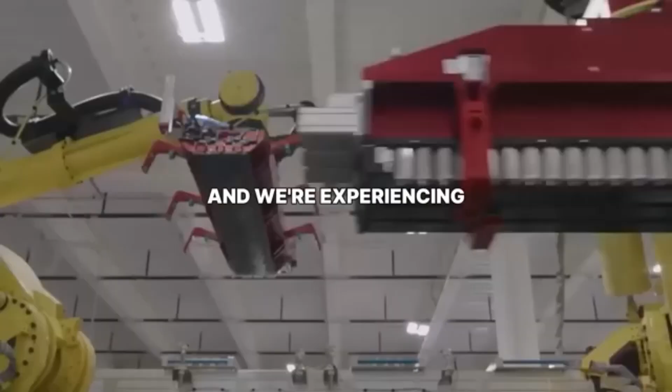We are 70% water and only 30% land. And so really, the availability of fresh water is simply about energy and transport. Obviously, the issues we're facing are very serious, with climate change, and we're experiencing these issues on a day-to-day basis.

Tesla has long been at the forefront of battery innovation, with every vehicle relying on its advanced lithium-ion technology. The evolution of the Model Y, much like the Model 3, has seen steady improvements, most notably the introduction of Tesla's groundbreaking 4680 cell battery.

But now Elon Musk announced that he would be using aluminum-ion batteries for its 2025 Tesla Model Y. What makes this new battery so special, and will this battery be the one to replace lithium-ion technology and power the next generation of Tesla's Model Y? Tesla's next big battery leap.

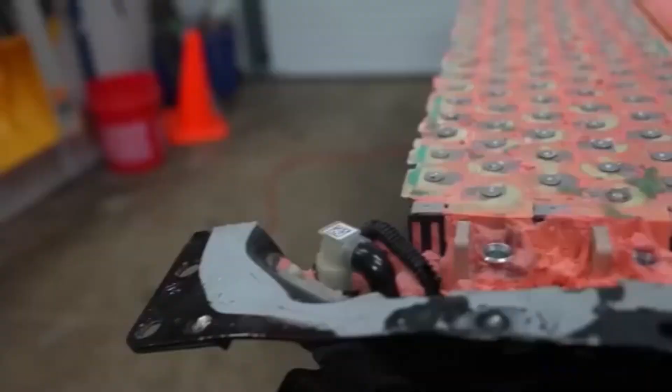If you know Elon Musk, you know he's a man who loves challenging the odds. His habit of breaking barriers and presenting bold ideas sets Tesla apart from competitors like Volkswagen and GM. From revolutionizing electric vehicles to evolving solar energy, the company has consistently pushed beyond the limits of what's possible. And now, with the same spirit, Tesla is taking on a new challenge with aluminum-ion battery technology, an innovation that could change the game for energy storage, electric vehicles, and sustainable living.

With this bold vision, Tesla would be the first automotive company to use an aluminum-ion battery, and it's easy to see why this breakthrough is sparking so much excitement. With the potential to charge fully in 15 minutes, aluminum-ion batteries are rewriting the rules for the future of electric vehicles. This next-generation technology has the potential to redefine how we think about powering our cars.

Under Elon Musk's leadership, Tesla is once again pushing the boundaries of what's possible, exploring this cutting-edge technology to drive the next wave of innovation. But what exactly makes aluminum-ion batteries so special, and why do they hold so much potential?

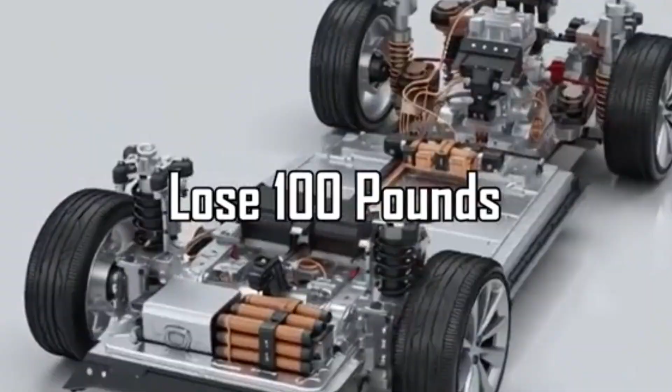To start, aluminum-ion batteries bring several remarkable advantages to the table. Aluminum, the third most abundant element on Earth, is a game-changer in terms of accessibility and cost. Unlike lithium, which requires intensive and often environmentally damaging mining practices, aluminum is easier to recycle without compromising quality. This means that these batteries are not only more affordable to produce but also far more sustainable, aligning with Tesla's vision of an eco-friendly transportation future.

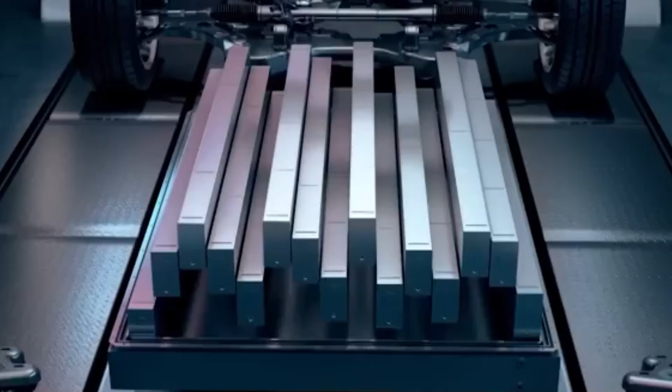The backbone of this technology is a state-of-the-art material, an organic redox polymer based on phenothiazine. While it sounds complex, this innovative material essentially allows aluminum-ion batteries to hold more energy than traditional designs. In fact, their storage capacity, measured at 167 mAh per gram, significantly outperforms the graphite typically used in lithium-ion batteries. This innovation opens the door to higher energy density and better performance, making aluminum-ion batteries a strong contender to replace lithium-ion technology.

Not only this, but the aluminum-ion batteries have the potential to achieve an energy density of 1,060 watt-hours per kilogram. To put that into perspective, today's lithium-ion batteries typically cap out at around 450 watt-hours per kilogram. This means that aluminum-ion batteries could store over twice as much energy without increasing the size or weight of the battery pack. For EVs, this translates into a significantly extended range, potentially up to 2,000 miles on a single charge.

Imagine driving across the country without worrying about running out of power. That's the promise this technology holds. But it's not just about how far you can go, it's also about how quickly you can get back on the road. Aluminum-ion batteries are designed to fully charge in just 15 minutes, as we said previously, a dramatic improvement

over the 30 to 45 minutes required by most lithium-ion batteries to reach 80%. This kind of rapid charging could transform charging stations into quick pit stops, making EVs as convenient to recharge as filling up a traditional gasoline tank.

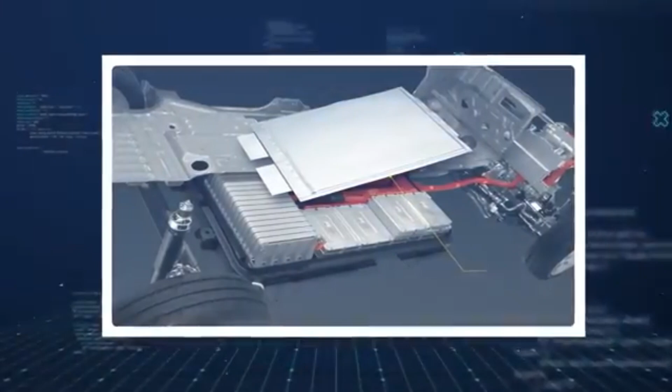Durability is another standout feature of aluminum-ion technology. These batteries are built to last, retaining 88% of their capacity after 5,000 charge cycles. Under optimal conditions, they can support up to 15,000 cycles, giving them a potential lifespan of 20 years or more. This durability not only reduces the need for replacements but also makes EV ownership more cost-effective and sustainable.

But what about Tesla's current lithium-ion technology? What challenges are pushing the company to explore this new frontier, and can aluminum-ion batteries truly deliver on their promise to revolutionize EVs? To understand the driving force behind Tesla's shift, we need to take a closer look at the limitations of the 4680 battery and the opportunities that aluminum-ion technology presents. Why lithium battery can't keep up?

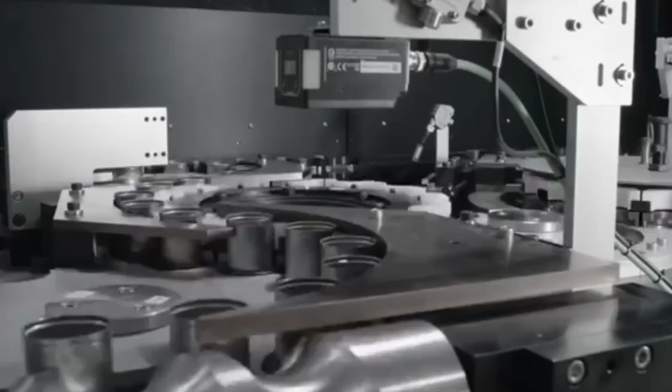Tesla's 4680 battery has been a major milestone in the evolution of electric vehicle technology, offering significant improvements over its predecessors. With its innovative tabless design and advanced chemical composition, the 4680 battery has brought new levels of efficiency, power, and integration to Tesla's lineup.

It powers vehicles like the Model Y, delivering a range of approximately 330 miles on a single charge and charging to 80% in around 30 minutes using a supercharger. Yet despite these advancements, the limitations of lithium-ion technology remain, and these constraints highlight the growing need for alternative solutions.

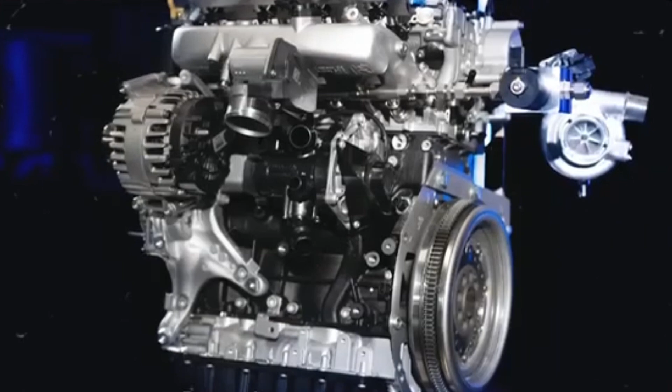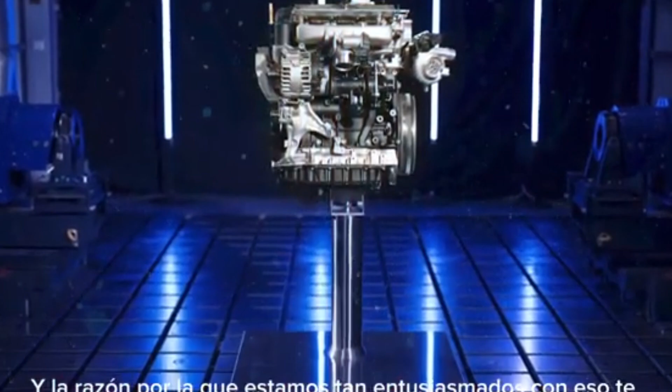One of the most prominent challenges lies in the energy density of lithium-ion batteries. The 4680 cells, with a density of around 255 to 280 watt-hours per kilogram, represents a significant leap forward compared to earlier designs. However, this still restricts how far an electric vehicle can travel on a single charge. While Tesla has optimized the use of this energy to extend range, it is clear that lithium-ion technology is nearing its ceiling, making it harder to push boundaries without exploring entirely new materials and designs.

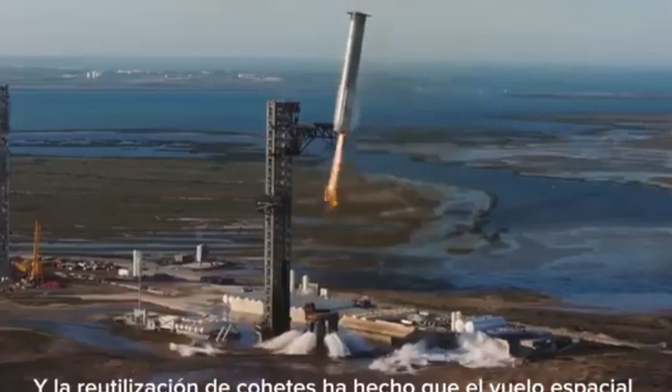Charging speed is another area where lithium-ion technology shows its limitations. Although the 4680 battery can reach 80% charge in 30 to 45 minutes, this is still a far cry from the convenience of refueling a gasoline vehicle. For drivers looking for quick and efficient pit stops, this can feel like a compromise, especially when electric vehicles are marketed as the future of transportation. Faster charging remains a crucial goal to make EVs more accessible and practical for a wider audience.

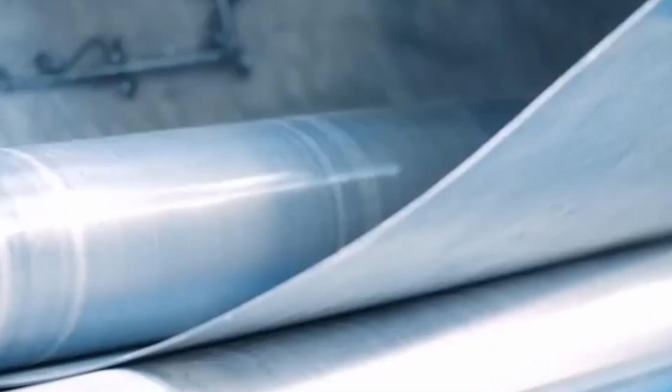We can't ignore the safety concerns here. These batteries rely on a flammable liquid electrolyte, which, in the event of physical damage or internal faults, can lead to thermal runaway. This phenomenon, where overheating causes a chain reaction that can result in fires or explosions, is a significant risk that EV manufacturers must address. Tesla's cooling systems mitigate this danger, but these systems occupy valuable space within the vehicle, space that could otherwise be utilized for more energy storage or additional passenger comfort. The reliance on such complex safety mechanisms underscores the inherent risks of lithium-ion batteries.

Beyond performance and safety, environmental and economic challenges further complicate the widespread use of lithium-ion batteries. The materials used in their construction, such as lithium and cobalt, are not only expensive but also difficult to recycle. These components often require resource-intensive processes to recover, making recycling costly and environmentally taxing.

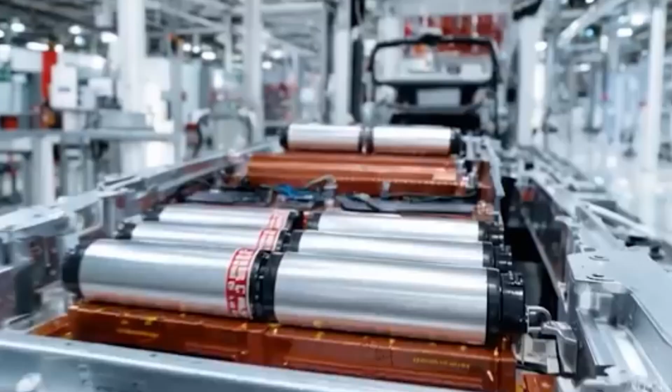Structural integration is one of the standout innovations of the 4680 battery, where the battery pack itself becomes part of the vehicle's chassis. This design enhances rigidity, reduces weight, and optimizes interior space, marking a significant improvement in vehicle efficiency. However, this innovation does not eliminate the fundamental reliance on lithium and cobalt, materials that remain costly and environmentally problematic. While the structural integration of the 4680 battery has undoubtedly pushed the boundaries of what lithium-ion technology can achieve, it also highlights the limitations that come with it.

These challenges point to a pressing question: is lithium-ion technology enough to sustain the rapid advancements needed in the electric vehicle industry? Addressing these limitations requires looking beyond lithium-ion technology altogether, and that's where aluminum-ion batteries come into the conversation. But along with this, there comes another question: can aluminum-ion batteries overcome these limitations and redefine the future of electric vehicles? The battery that breaks limits.

Building on this momentum, Tesla's shift toward aluminum-ion batteries isn't just an incremental upgrade, it's a bold step toward addressing the fundamental challenges of lithium-ion technology. These batteries promise to redefine the electric vehicle experience, tackling everything from charging speed to safety and sustainability. So how exactly do aluminum batteries aim to overcome the limitations of their lithium-ion predecessors?

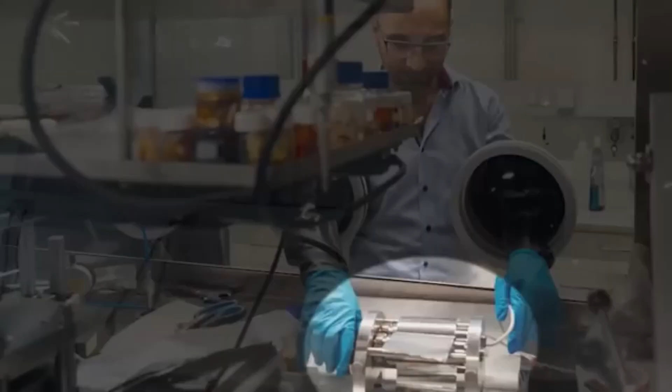Let's start with one of the most revolutionary aspects: charging speed. Aluminum-ion batteries promise to fully charge in just 15 minutes, a feat that makes them 20 times faster than current lithium-ion batteries. Imagine pulling into a charging station, plugging in your car, and being back on the road before you've even finished your coffee. For drivers who've grown accustomed to the slower charging times of lithium-ion systems, this change transforms EV ownership into something far more convenient and practical. It's a leap that could make charging your EV feel as seamless as refueling a gasoline car, eliminating one of the last hurdles holding back widespread adoption.

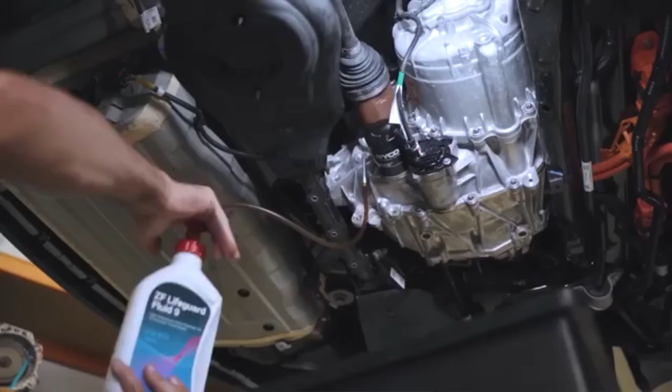Speed, however, is only part of the story. Aluminum-ion batteries also boast an impressive energy density of up to 1,000 watt-hours per kilogram, a significant improvement over the 4680 battery's maximum of 280 watt-hours per kilogram. This leap in energy density means that vehicles equipped with aluminum-ion batteries could achieve ranges of up to 2,000 miles on a single charge, an astonishing figure that makes even the most ambitious lithium-ion systems look outdated.

For drivers, this translates into fewer charging stops and the freedom to take long road trips without the constant worry of running out of power.

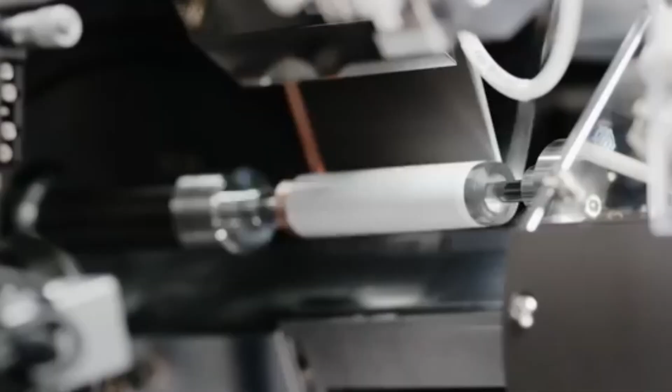Durability is another area where aluminum-ion batteries excel. These batteries can support up to 15,000 charge cycles with proper management, significantly outlasting the lifespan of lithium-ion batteries. To put that into perspective, a car powered by an aluminum-ion battery could remain operational for over 20 years without requiring a battery replacement. This longevity not only reduces costs for drivers but also minimizes the environmental impact of producing and disposing of battery materials. It's a win-win that aligns perfectly with Tesla's commitment to sustainability.

Previously, we touched on the safety concerns surrounding lithium-ion batteries due to their flammability. Aluminum-ion batteries address this issue with their non-flammable design and exceptional stress tolerance. This makes them far less prone to the overheating and thermal runaway issues that have plagued lithium-ion systems.

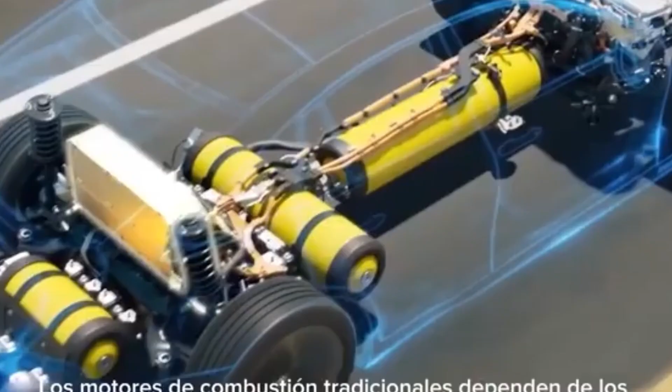The standout feature of aluminum-ion batteries lies in their sustainability, perfectly aligning with Elon Musk's vision of creating a greener, more sustainable future. Aluminum is one of the most abundant elements on Earth, making it a far more accessible and cost-effective resource than lithium. Its abundance not only reduces production costs but also alleviates the geopolitical and environmental challenges associated with mining rare materials like cobalt and lithium. Additionally, aluminum is highly recyclable, ensuring that these batteries align with Tesla's mission of creating environmentally responsible solutions. By shifting to aluminum-ion technology, Tesla isn't just making EVs more efficient, it's making them sustainable.

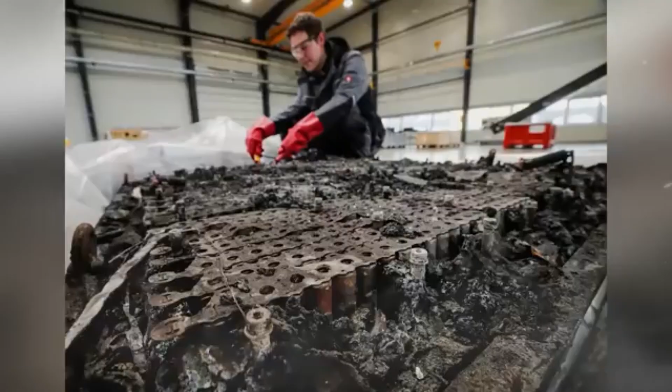It's worth noting how aluminum-ion batteries connect back to some of the challenges posed by lithium-ion systems. While the advantages of aluminum-ion batteries are clear, of course no technology is perfect, and aluminum-ion batteries do have their challenges. The promise of faster charging, greater range, and improved sustainability is exciting, but it also raises questions about the technical hurdles that remain. Can aluminum-ion batteries achieve the high voltage required for demanding EV applications? How does Tesla plan to tackle them? Can this promising technology truly live up to its potential?

Aluminum-ion's toughest roadblocks. While aluminum-ion batteries promise to revolutionize the EV industry with their speed, safety, and sustainability, the challenges are also real. A key challenge that stands out is the voltage limitation of aluminum-ion batteries. Currently, these batteries generate only about half the voltage of their lithium-ion counterparts. Voltage is a critical factor for powering EVs as it directly impacts the battery's ability to meet the high demands of electric motors. While aluminum-ion technology excels in energy density, its lower voltage output means it struggles to deliver the same level of performance required for today's electric vehicles.

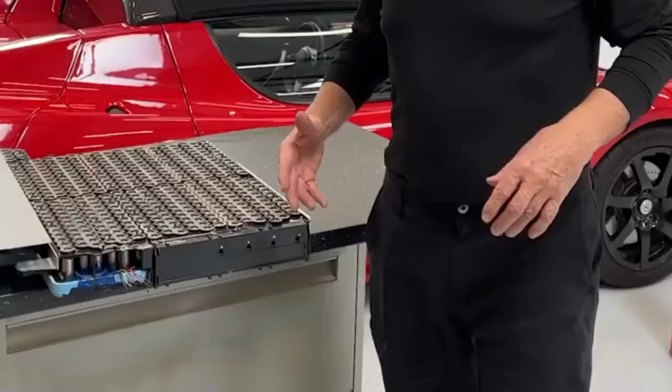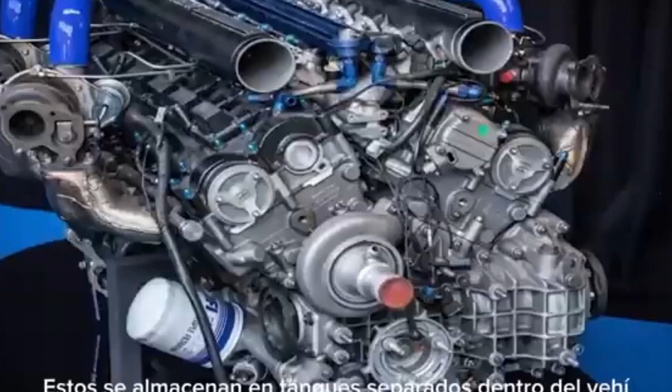This limitation underscores the need for further research and development to bring aluminum-ion batteries up to the standards of commercial EV applications. Beyond just voltage limitations, there are technical hurdles to overcome, particularly in the design of the battery's internal components. The use of advanced materials such as nanostructured cathodes is essential for improving the efficiency and performance of aluminum-ion batteries. These cathodes allow for better energy storage and faster charging while minimizing the degradation that occurs over time. However, developing these materials at scale is a complex and costly process. Researchers are actively exploring ways to refine the technology, but significant investments in material science and engineering are still needed.

Scaling production is another significant challenge. While aluminum-ion batteries hold great promise, their manufacturing processes are far more intricate than those of lithium-ion systems. For instance, the production of nanostructured cathodes and advanced electrolytes requires highly precise techniques that are not yet widely available. Tesla's ability to meet its ambitious production targets for vehicles like the Model Y will depend on whether these processes can be streamlined and scaled efficiently. Without this scalability, the cost of aluminum-ion batteries could remain prohibitively high, slowing their adoption in the EV market.

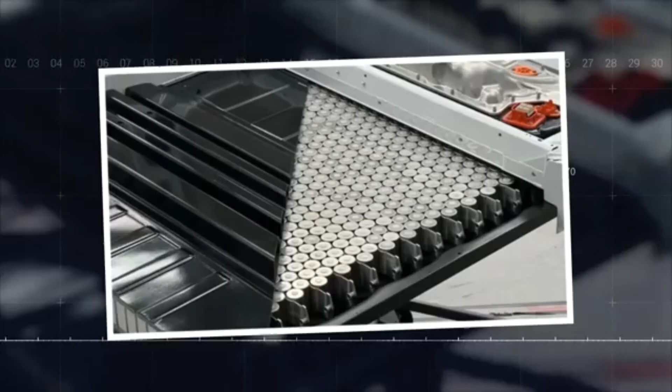On top of that, the potential success of aluminum-ion batteries is closely tied to the strength of their supply chain. While aluminum is abundant and cost-effective, transitioning to a new material base involves reconfiguring existing supply chains and manufacturing infrastructure. Tesla will need to ensure that its suppliers can meet the quality and sustainability standards required for aluminum-ion production. At the same time, the company must navigate potential bottlenecks in securing advanced materials like organic redox polymers and nanostructured components.

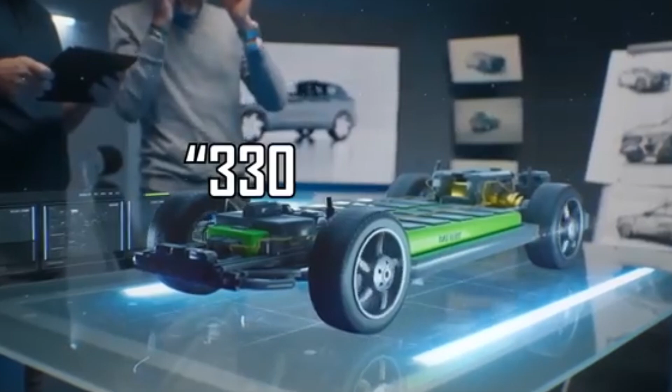Despite these challenges, there are reasons to remain optimistic. Tesla has a history of tackling complex problems and delivering innovative solutions, as evidenced by the success of its 4680 battery. The lessons learned from overcoming the limitations of lithium-ion technology could serve as a foundation for addressing the issues with aluminum-ion batteries. For instance, Tesla's dry electrode manufacturing process developed for the 4680 may provide insights into how to streamline the production of aluminum-ion batteries.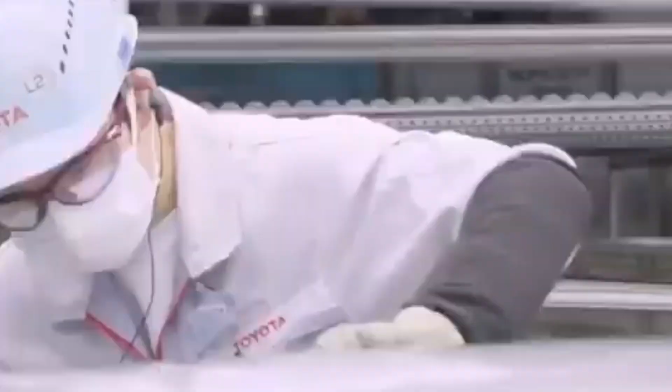It's also worth noting that many of these challenges are not unique to aluminum-ion batteries. Voltage scalability and supply chain issues have all been hurdles in the development of previous battery technologies, including lithium-ion systems. The fact that lithium-ion batteries evolved to meet the demands of modern EVs suggests that aluminum-ion technology could follow a similar trajectory with the right investments in research and infrastructure.

Taking stock of what aluminum-ion batteries offer, it's clear that the potential rewards justify the effort. These batteries offer a combination of features: faster charging, longer lifespan, and greater sustainability that address many of the shortcomings of lithium-ion technology. For Tesla, overcoming the challenges of aluminum-ion batteries isn't just about improving performance, it's about leading the way of sustainable transportation and solidifying its leadership in the EV market.

As Tesla continues to refine this technology, the stakes couldn't be higher. Aluminum-ion batteries represent not only a leap forward for Tesla, but also a potential game-changer for the entire EV industry. They have the power to set a new standard for what electric vehicles can achieve, from extended range to faster charging and beyond.

The potential impact of aluminum-ion batteries on Tesla's 2025 Model Y is nothing short of transformative. With groundbreaking features like extended range, faster charging, and unmatched longevity, these batteries promise to redefine the electric vehicle experience and set a new standard for the industry. But what makes this innovation so revolutionary, and how will it redefine the future of EVs?

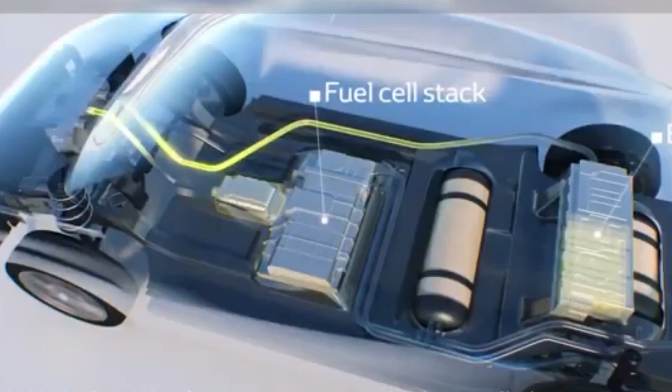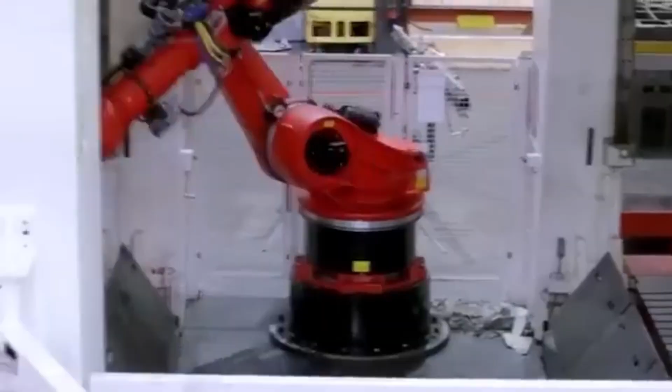To better understand this, imagine driving an electric vehicle covering up to 2,000 miles on a single charge. That's the kind of range aluminum-ion batteries could offer, dwarfing the current capabilities of lithium-ion systems, which typically top out around 330 miles per charge in Tesla's Model Y. This improvement in energy density, up to 1,000 watt-hours per kilogram, represents a leap forward in battery technology. For drivers, it means fewer stops on long journeys and the freedom to travel vast distances without constantly planning for charging stations. It's a solution that directly addresses one of the most common concerns for EV owners: range anxiety.

Charging speed is another area where aluminum-ion batteries stand out. These batteries can fully charge in just 15 minutes, a fraction of the time required by current lithium-ion systems, which take 30 to 45 minutes to reach 80% capacity using Tesla's superchargers. This rapid charging capability could make EVs as convenient as refueling a gasoline car, eliminating one of the last perceived disadvantages of electric vehicles. For busy drivers and families on the go, this efficiency could be a game-changer, making electric vehicles an even more appealing choice.

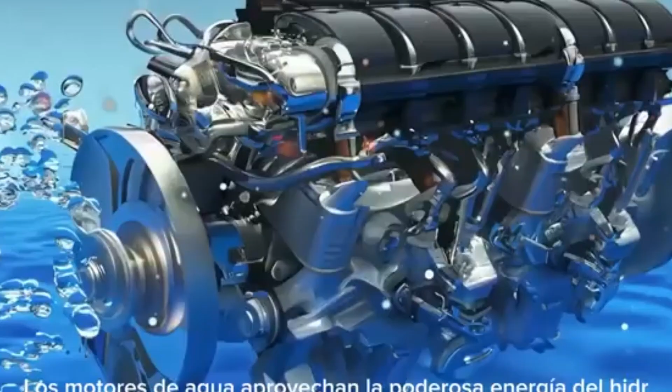But aluminum-ion batteries don't just offer more range and faster charging. They also last longer, with the ability to support up to 15,000 charge cycles. These batteries could virtually eliminate the need for replacement over a vehicle's lifetime. This durability not only makes aluminum-ion batteries more cost-effective, but also reduces waste, aligning perfectly with Tesla's commitment to sustainability.

The broader implications of this technology extend far beyond individual vehicles. By integrating aluminum-ion batteries into the 2025 Model Y, Tesla sets a new benchmark for the entire EV industry. Competitors like Rivian and Lucid Motors, and traditional automakers such as Ford and General Motors, will feel the pressure to innovate or risk being left behind. Aluminum-ion batteries offer a combination of features that competitors simply cannot match with existing lithium-ion systems, forcing the industry to accelerate its adoption of advanced energy storage solutions.

Beyond their impact on vehicles, aluminum-ion batteries also have the potential to revolutionize how we think about energy storage. With enhanced compatibility with renewable energy grids and vehicle-to-grid applications, these batteries could turn EVs into mobile energy hubs. It is just like using your car to store excess solar energy during the day and then feeding that energy back into the grid or your home at night. This capability not only maximizes the utility of renewable energy but also reduces reliance on fossil fuels, contributing to a cleaner and more efficient energy ecosystem.

For Tesla, this innovation represents more than just a technological breakthrough.

It's a strategic move that reinforces the company's leadership in the EV market. By adopting aluminum-ion batteries, Tesla demonstrates its commitment to pushing the boundaries of what electric vehicles can achieve. This move solidifies Tesla's reputation as an innovator and a pioneer in sustainable transportation, setting it apart from competitors and inspiring confidence among consumers and investors alike.

Moreover, the adoption of aluminum-ion batteries could drive EV adoption on a much larger scale by eliminating range anxiety, reducing charging times, and lowering long-term costs. These batteries make electric vehicles more accessible and practical for a wider audience.

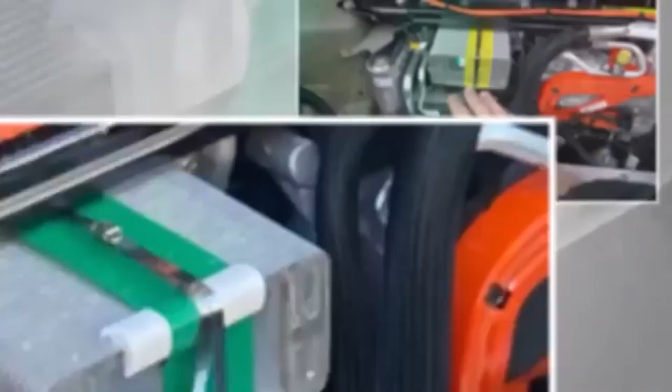For many potential buyers, these advancements address the key concerns that have traditionally held them back from making the switch to electric. As more drivers experience the benefits of aluminum-ion technology, the momentum toward a fully electric future could accelerate rapidly. It's worth noting how these revolutionary features build upon the lessons learned from previous innovations.

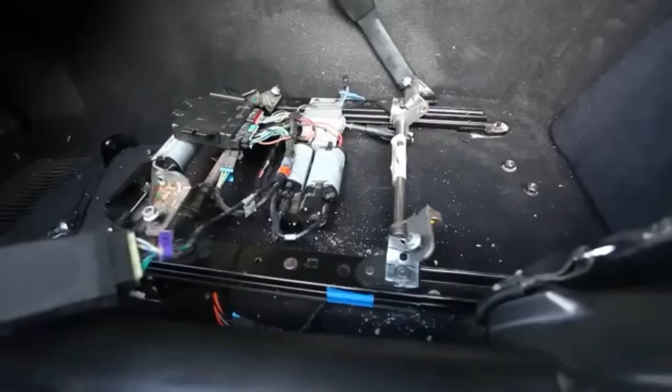For example, the structural integration of the 4680 battery demonstrated the importance of optimizing space and weight in vehicle design. Aluminum-ion batteries take this principle even further by offering greater energy density without increasing battery size, allowing for more efficient and versatile vehicle configurations. Similarly, the emphasis on sustainability reflects Tesla's broader mission, ensuring that technological progress is accompanied by environmental responsibility.

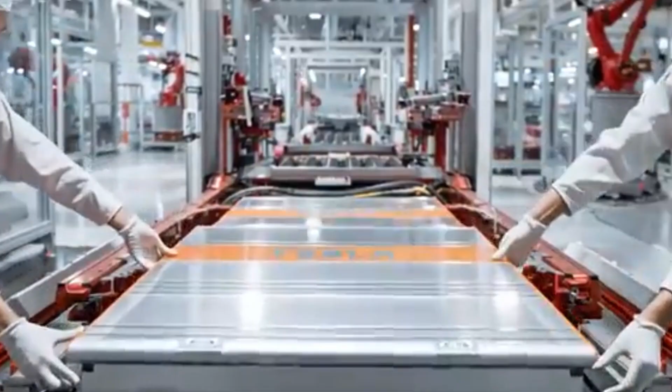Despite the challenges aluminum-ion batteries face in terms of scalability and development, their potential to change the EV industry is undeniable. These batteries promise to transform not only the 2025 Model Y but also the broader energy ecosystem, making electric vehicles more efficient, sustainable, and user-friendly than ever before.

As Tesla continues to refine this technology and prepare for its integration, one thing is clear: aluminum-ion batteries have the power to propel the EV industry into a new era. The only thing left is how quickly these advancements can be brought to market and how they will influence the choices of other automakers.

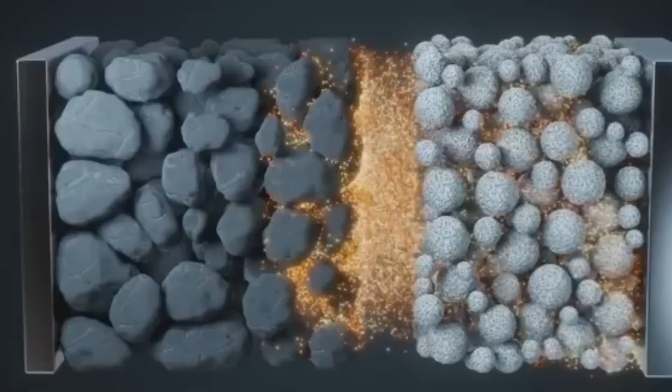Tesla's aluminum-ion battery has the potential to revolutionize electric vehicles with its speed, range, and sustainability, but with challenges like voltage limitations and production hurdles, the road ahead isn't without its obstacles.

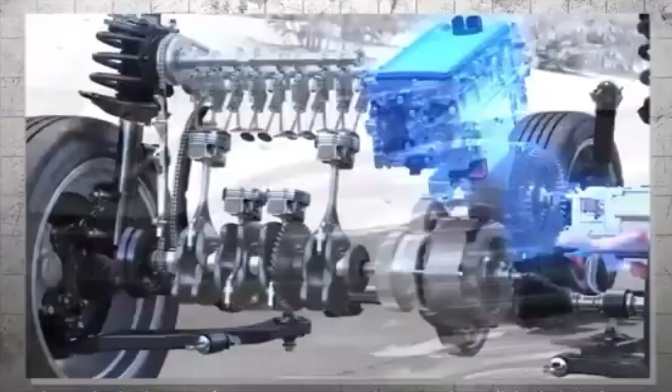The sleeping giant awakens. Toyota has been a key player in the car industry since the early 1900s. Back in the year 1933, the company was just starting to dip its toes into automobiles, shifting from textile machinery to car manufacturing. The first big move came in the year 1936 when they rolled out the Model AA sedan that kicked off decades of reliable, practical, and affordable cars, exactly what made Toyota a household name.

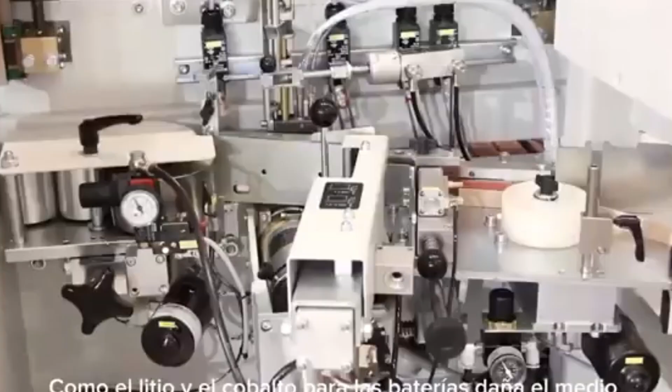Toyota's story began early, transitioning from textile machinery to car manufacturing in the 1930s, with milestones like the Model AA sedan in 1936 and the Corolla in 1966, cementing its reputation for dependable, affordable cars.

Meanwhile, Elon Musk's journey started not with cars but technology. In the 1990s he built Zip2, followed by PayPal, revolutionizing online finance. In the early 2000s, Musk focused on Tesla, aiming to make electric cars not just practical but desirable.

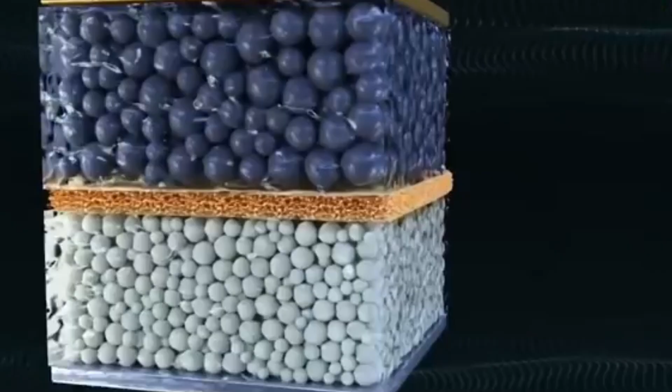The early Tesla Roadster proved the concept, and the Model S in 2012 changed everything, showing electric cars could be powerful, stylish, and profitable. Toyota took a different path by perfecting hybrids, introducing the Prius in 1997, a game-changer that combined a gas engine with an electric motor, cutting fuel consumption dramatically and making hybrid cars affordable and popular.

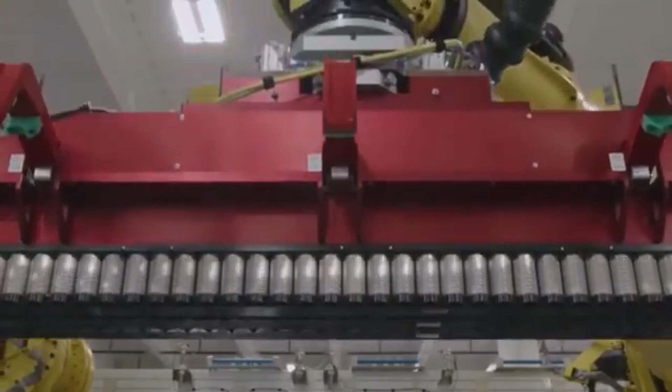While Toyota refined hybrids, Tesla pushed full electric. The Model S proved electric cars could be luxury vehicles, boasting range, speed, and technology that turned heads. Tesla's charging network expanded, and EVs shifted from niche products to serious competitors against gas-powered cars.

Other automakers like Ford, General Motors, and Volkswagen entered the electric market, but challenges emerged. Charging infrastructure lagged, causing range anxiety, and charging times were much longer than refueling gas cars. For those without home chargers, switching to electric was impractical.

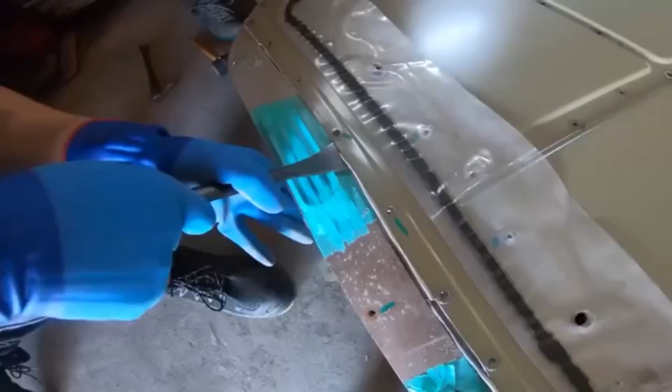Despite incentives, EVs remained costly due to expensive batteries and rising raw material prices. Toyota kept improving hybrids, making them cheaper, more reliable, and efficient. Now, Toyota is developing a next-generation engine combining efficiency, sustainability, and convenience without relying solely on electric power.

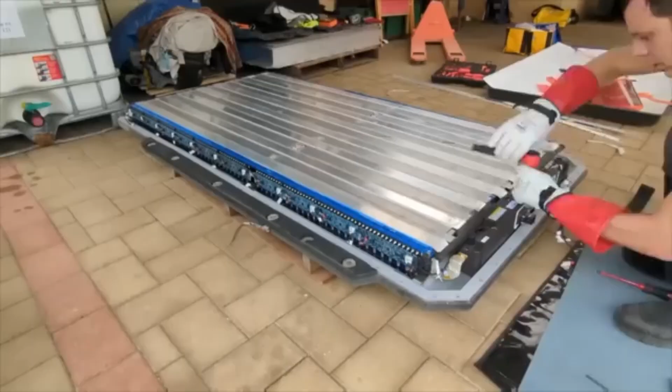This could make hybrids dominant again and pressure full electric cars. If successful, Toyota might prove EVs aren't the ultimate solution. Tesla, meanwhile, faces more competition as traditional automakers catch up, shrinking Tesla's unique edge. If Toyota's technology succeeds, the EV market could be shaken. But a major issue remains rarely discussed: the environmental and practical problems of EV batteries.

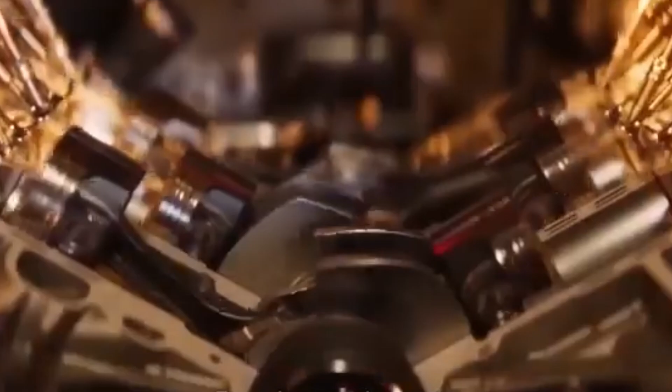EVs are marketed as greener, cleaner alternatives to gas cars, but battery production and disposal pose serious problems. Mining for lithium and cobalt damages environments and involves poor labor conditions. Recycling batteries is inefficient, and waste could pile up in landfills, creating new environmental hazards. These realities cast doubt on the green label of EVs.

The money problem is real too. EV prices have dropped but remain higher than traditional cars, mainly due to battery costs and expensive materials. High interest rates and economic uncertainty make buyers cautious, and many see gas cars as a more affordable choice. Government incentives that helped early EV adoption are fading globally, reducing buyers' motivation to switch.

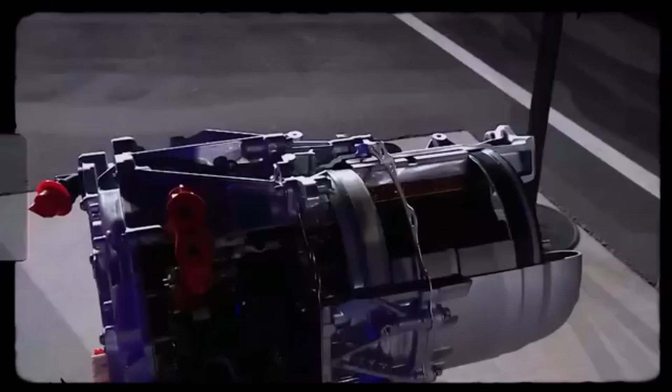This cooling off is worldwide. Tesla's U.S. market share dropped from nearly 80% of EV sales to less than half. In China, Tesla lost ground to local brands like BYD, and in Europe, sales fell sharply as Volkswagen and Toyota gained. People are reconsidering EVs, and Tesla's dominance is challenged.

Tesla's revenue growth has stalled, with little improvement expected, causing analysts and investors concern. Elon Musk faces mounting pressure amid recent controversies. The EV industry is hitting roadblocks. Charging networks aren't adequate, battery production is problematic, and prices remain high. So, if EVs aren't perfect, what's next?

Toyota stands out. While Tesla and others focus on pure electric vehicles, Toyota invests broadly in hybrids, plug-in hybrids, hydrogen fuel cells, and battery EVs. Rumors suggest Toyota may be developing something revolutionary.

Known for reliability and practicality, Toyota's gasoline and diesel engines have powered durable vehicles. The hybrid revolution started with the Prius, and Toyota even explored hydrogen fuel cells with the Mirai, which emits only water vapor. Though hydrogen hasn't taken off widely, Toyota's commitment to alternative tech is clear.

Tesla took a different route: no hybrids, no fuel cells, only pure electric. Tesla's motor tech has been groundbreaking. The Model S Plaid offers extreme acceleration and efficiency.

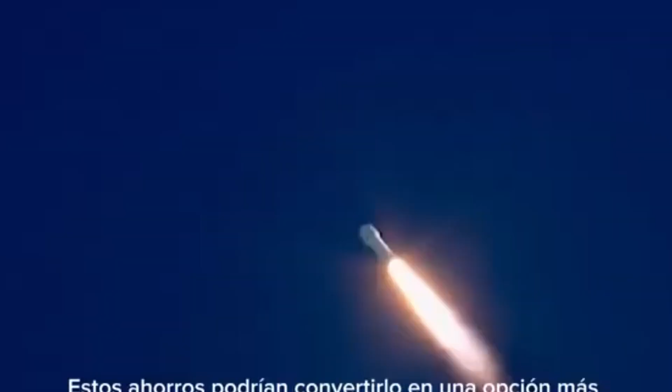Tesla also pushes battery innovation, aiming for batteries lasting 1 million miles to extend vehicle life and reduce recycling needs. They manufacture batteries in-house to avoid supply chain issues. No doubt, Tesla has been leading the charge in electric propulsion, but Toyota is playing a longer game.

While Tesla was all in on electric vehicles, Toyota stayed cautious, investing in multiple options instead of betting it all on one. That strategy might finally be paying off. If battery electric vehicles are losing steam, Toyota has something else up its sleeve, and that is where the real twist comes in. Some insiders say Toyota has been working on an engine that could change everything people think they know about cars.

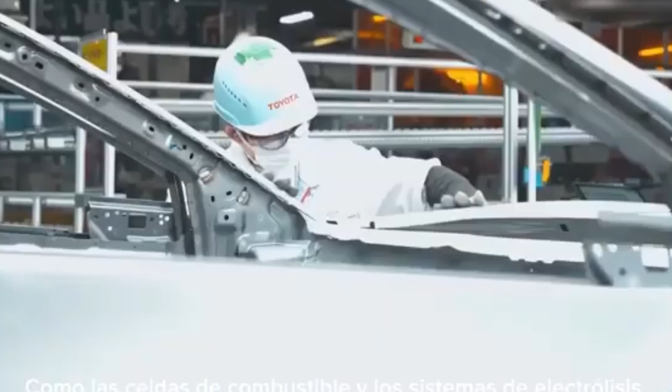A new kind of hydrogen-based system, but way different from the fuel cell technology seen before. Supposedly, this thing can extract hydrogen from water directly inside the vehicle, meaning no need for an extensive hydrogen fueling network. If that is true, this could be a game-changer: cleaner than batteries, easier to refuel than electric cars, and possibly much cheaper to produce in the long run.

Rumors say the engine works by using an advanced catalyst that makes the hydrogen extraction process super efficient. No heavy, expensive batteries needed, no waiting hours to charge, and no massive environmental impact from mining rare materials. If Toyota really has cracked this technology, they might just leap ahead of the electric vehicle industry and introduce something even better.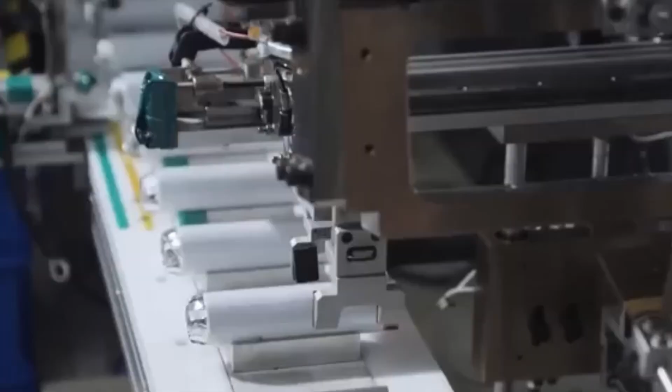Even Elon Musk, the biggest advocate for electric vehicles, is rumored to be paying attention. If the man who built Tesla into an empire is reconsidering his stance, that says a lot. Whether Toyota actually brings this to market soon or not, one thing is clear: the race for the future of transportation is not as settled as many thought.

While Toyota and Tesla battle it out, another giant is quietly taking control, and it's happening faster than anyone expected: the rise of Build Your Dreams. Over in China, the biggest electric vehicle market on the planet, Tesla's grip is slipping. Local automakers are coming in strong, and there is a brutal price war shaking things up. If Tesla had not slashed prices by a whopping 20 to 30%, its sales would have taken a real nosedive.

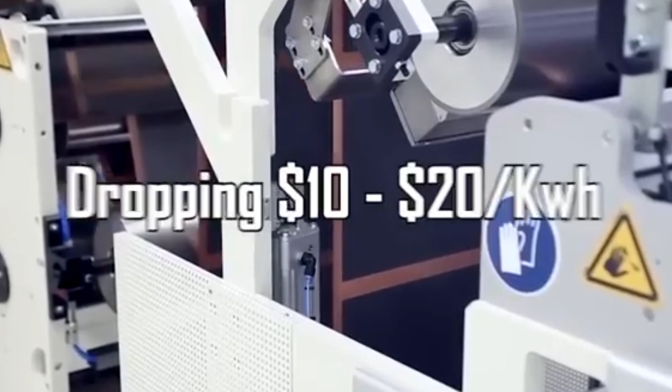There is one company in particular making life tough for Tesla. Build Your Dreams is turning into Tesla's worst nightmare. In 2023, Build Your Dreams registered nearly 2.5 million new cars in China, putting them at number one with an 11% market share. This kind of growth is unheard of.

Month after month, Build Your Dreams is topping the charts. The numbers do not lie. Over 3 million new energy vehicles rolled out of their factories last year, leaving Tesla's 1,800,000 in the dust. Build Your Dreams is not just winning, it is way ahead in China.

Early on, Elon Musk brushed off Build Your Dreams as just another startup, but those times are long gone. Chinese automakers are no joke anymore. Once foreign brands ran the show in China, now Chinese brands own the game. Their cars are not just cheap, they are actually good.

Build Your Dreams is not stopping in China, they are setting their sights on the rest of the world. Last year, their exports shot up over 300%, hitting nearly 250,000 cars across 70 countries. Build Your Dreams already owns about 40% of the Chinese electric vehicle market and is making moves into Australia, Japan, Europe, and even knocking on the door of the United States. Analysts predict Build Your Dreams could break into the global top 5 automakers by 2026. This year, they are already on track to hit the top 10.

Build Your Dreams started way back in 1995, not as a car maker, but as a battery company. Wang Chuanfu, the founder, set up shop in Shenzhen, China. For the first decade, it was all about low costs. They churned out batteries for big names like Motorola and Nokia, undercutting competitors left and right.

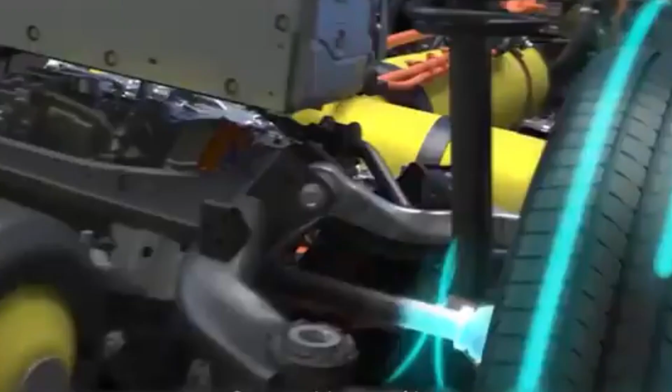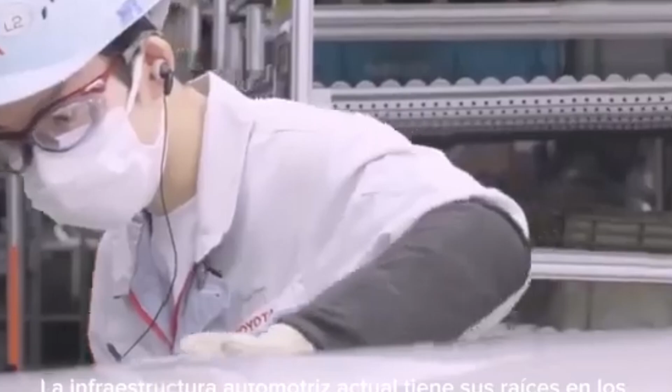Then in 2003, they made a bold move into the car business by buying a struggling automaker. Their first car, the F3, hit the market in 2005. It was a gas-powered knockoff of the Toyota Corolla. By 2008, they launched the F3DM, a plug-in hybrid, but it was not exactly a game-changer. Early Build Your Dreams cars were cheap, clunky, and forgettable. They finally went fully electric in 2010 with the E6. Taxis loved it because they got incentives, but regular folks were not biting.

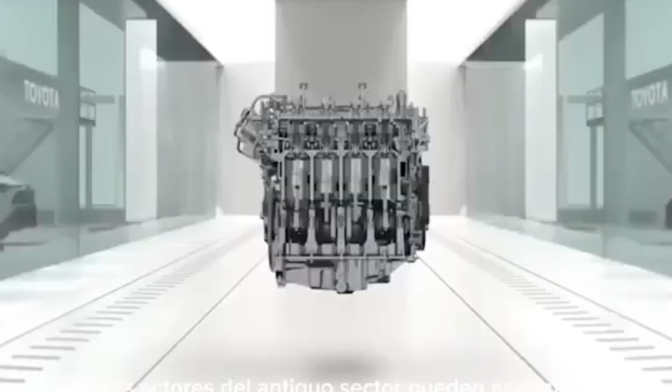Through most of the 2010s, Build Your Dreams auto division was stuck in slow gear. Sales were growing but not by much. By 2018, things were looking rough. Sales were even dropping year over year. But then something clicked around 2019. Build Your Dreams started cranking out better-looking cars. Models like the Tang and Han, designed by top German designers, finally had some style. In 2022, they dropped gas-powered cars altogether, focusing only on hybrids and electric vehicles.

That shift changed everything. Build Your Dreams got a big boost from Warren Buffett's Berkshire Hathaway, which invested in them way back in 2008. Buffett admitted he did not get the whole electric vehicle thing but believed in Wang Chuanfu. That bet paid off big time. Build Your Dreams stock has skyrocketed more than 1,400% since Buffett first got in. But even Buffett has been cashing out, selling off more than 60% of his stake since last summer.

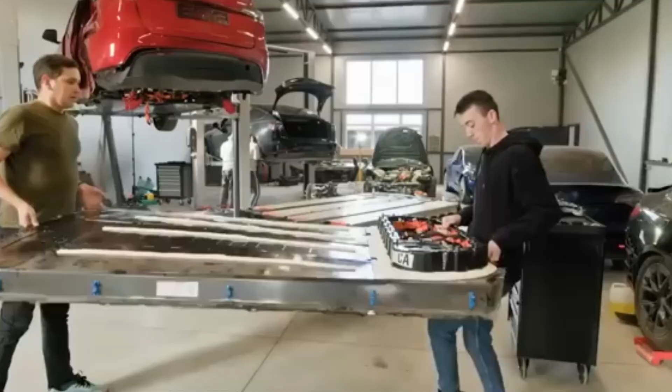Some say it is geopolitics. Others say it is the electric vehicle price war Tesla started. Either way, Build Your Dreams is still standing strong. Build Your Dreams' ace up its sleeve is price. They are undercutting everyone. Take the Seagull, launched in Munich last year, with a price tag of $11,500. That is way below anything Tesla offers. Most of Build Your Dreams cars are in the affordable range, hitting the sweet spot where the real volume is.

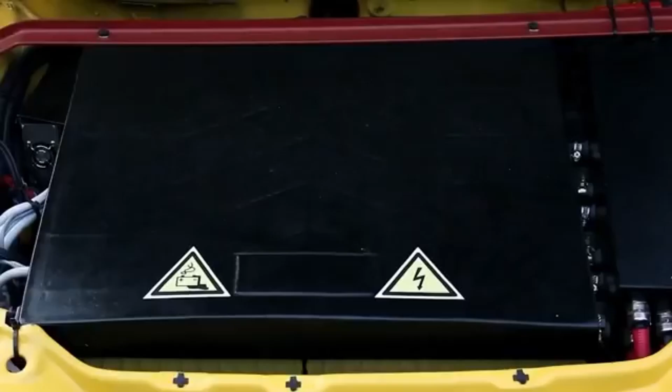Another big win is batteries. That is the most expensive part of an electric vehicle, and Build Your Dreams owns the whole process. They do not just make their own batteries, they sell them to other car makers too, including Tesla, Toyota, and Kia. Their Blade battery, launched in 2020, is a game changer. It is a lithium iron phosphate battery that is safer, cheaper, lasts longer, and has gotten the whole industry's attention.

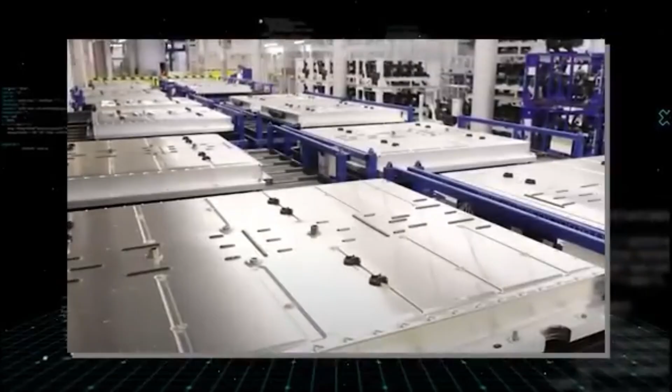Build Your Dreams is not just making passenger cars. They also have electric buses and trucks and even build electric buses in California. But passenger cars are where the real money is, and Build Your Dreams is going all in. Their lineup has something for everyone. The Dynasty series has budget-friendly options like the Qin at $14,000 and the high-end Tang at $34,000. The Ocean series is aimed at younger buyers with the tiny Seagull at $10,000 and the Seal sedan at $22,000.

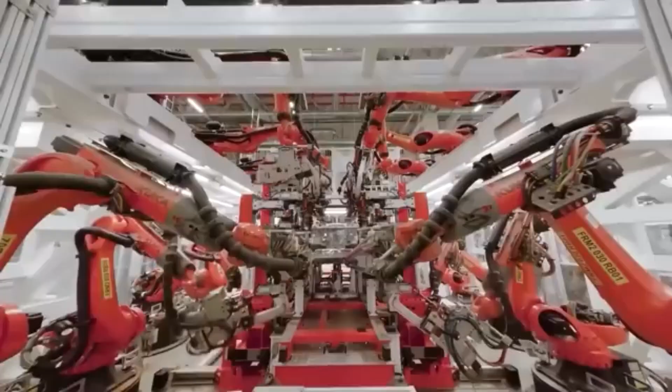They have also stepped into the luxury game with brands like Denza, Yangwang, and Fangchengbao. They are not just making cheap cars anymore. They are making supercars and sport utility vehicles that can go head-to-head with the best in the business. Outside China, Build Your Dreams is already dominating Southeast Asia. They own 43% of the electric vehicle market there and are number one in Thailand, Brazil, Colombia, and Israel. In Thailand alone, they went from 0 to number 1 in just a year.

If tariffs drop, would you drive a Build Your Dreams, or is brand loyalty worth the extra cash?